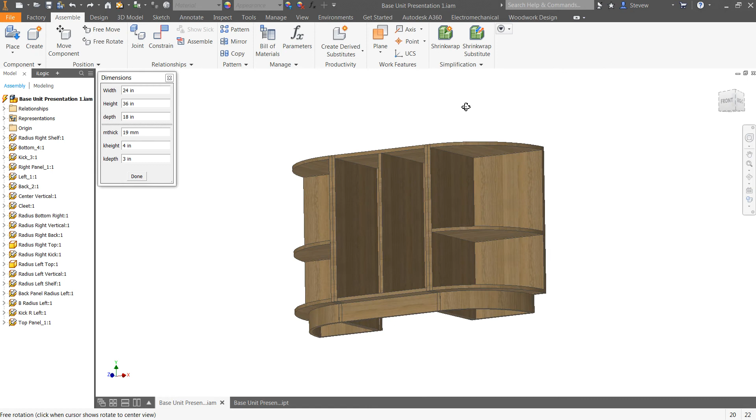In our first session, we showed how we could model this very quickly and also have it fully adjustable and adaptable to the needs of our clients, staff, management, or whoever else needs possible changes in the model. These were all done using iLogic. If we want to change the length of this unit from 24 to 32, and change the kick height from 4 inches to 2 inches, all we have to do is an update, and the entire cabinet changes as requested. So the ability to change after the fact in Inventor gives us a tremendous leg up in design.

Every single woodworking project I've ever seen always had some changes after we thought we were done.

The other aspect is we take a look at some of the joinery built in our last session. We have some simple dados for the back. Other things are just butted together. Let's just take a look at a shelf or two, and we'll see what we have. These shelves are just butted to it, and we'll show you how they're going to be doweled, biscuited, or just screwed in.

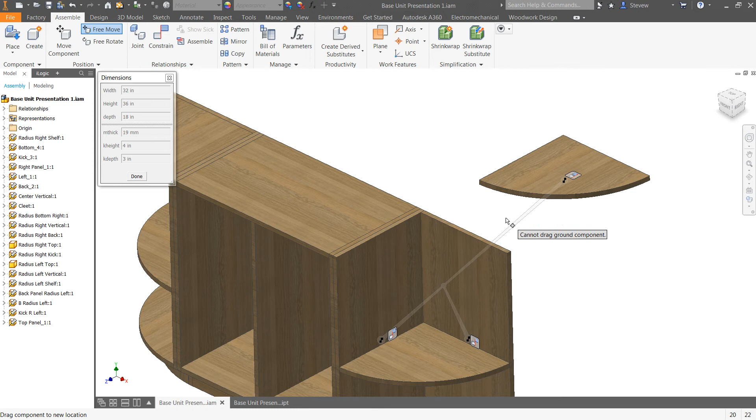The other thing about this is that these are all at one level—this is not an indented bill of material by any means. If I looked at the bill of material, we'd have a flat bill of material showing each of the parts. It's in something called a base presentation, and each of the parts is listed with their length, width, and thickness. This can go out to an Excel spreadsheet easily for cut listing.

Before we go much further, I'd like to group these. Obviously when we build, we probably build the two ends independently and the interior independently, and then pull it together. So the first thing I usually do is put a window around just the right panel, right click on it, and say I would like to take these components and demote them into an assembly, and we'll call this right unit, and pick OK. The right unit is now in its own assembly.

If you take a look in the browser, it says right unit, and if I want to turn the visibility on and off, you can see we now have control of that independently. Let's turn the visibility back on and do exactly the same thing with the left side. I'm going to put a window around it, make sure I catch everything necessary. Right click, go to component, demote, and we're going to call it left-dash unit, and pick OK.

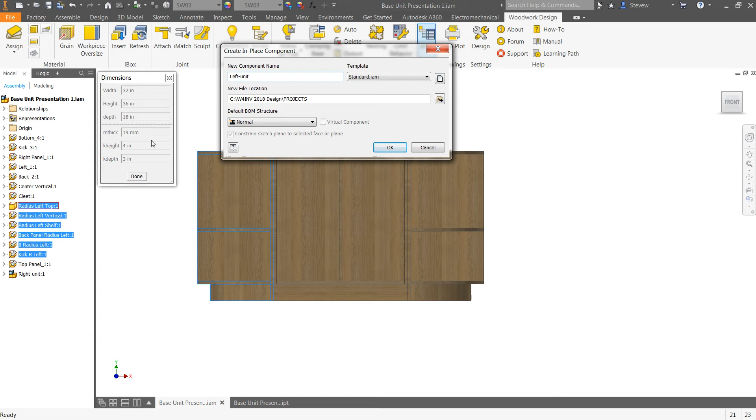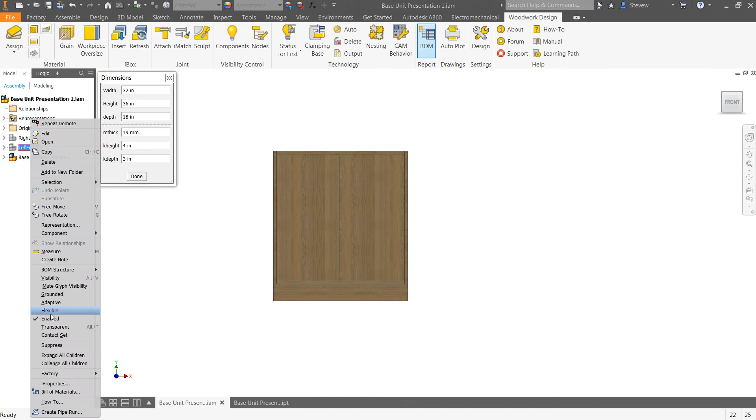I'll turn off the visibility of the left unit and the right unit. Each of these will act independently and can be opened and used independently. I'll put a window around everything left, and do the same thing again—component demote—and we'll demote this into a base square cabinet, and pick OK, and pick OK. Now if you look in the browser, you'll see that all of the different entities here are now independent units that could be opened up, saved, and used independently.

Just pick save and save our work.

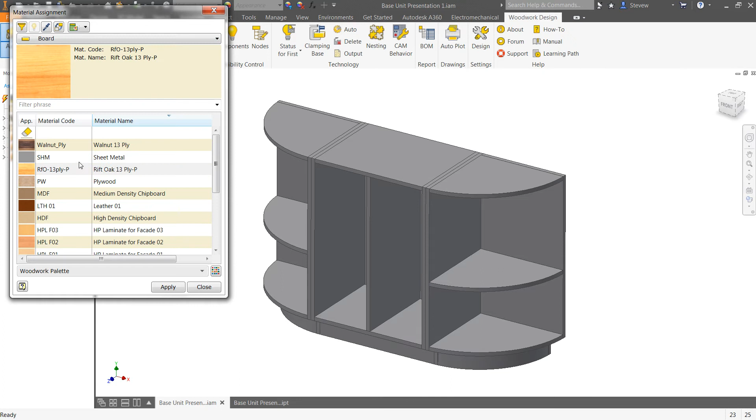Now, even though they are made up of 3 individual sub-assemblies, we still have the same type of control. Let's say it's 24 inches overall, and we'll do an update, and you'll see that it's adjusting also. If we don't like the grain and grain direction at this point, let me go ahead and remove all the materials of each of the parts—that's all 23 parts. And I'll say that everything should have been made out of rift oak, and pick apply.

By doing that, it's going through the system and already assigning it. If I want to say that one of these pieces is going to be made out of bird's eye maple, I'm just going to pick parts 1, 2, 3, 4, and 5, and now they're all going to be bird's eye maple. The quality of the imagery is really second to none, and I'm not even in a rendered mode.

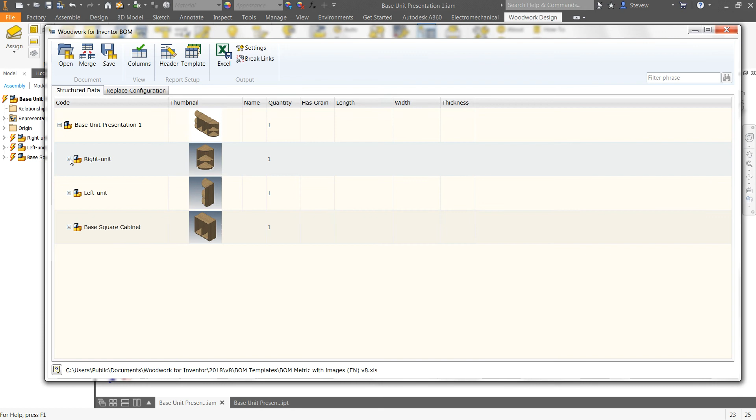At this level here, we have an indented bill. So if we went out to the bill of material, you'll start seeing the right unit with all the materials, here's the left unit, and so on.

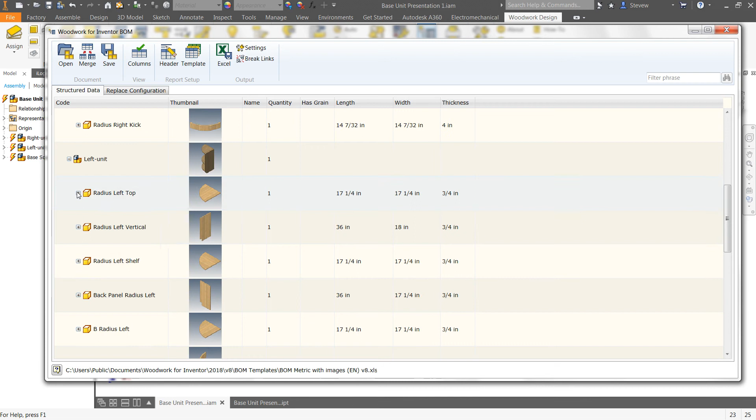And you can also notice that if you click on this, it's going to tell you what each of the parts are made out of. So a lot of capability.

The other thing is, as I said before, these are butt together. So if I move one of these pieces, you can see they're independent. Or if we go further and move just a shelf, you can see that the shelf itself has no joinery as of yet, and that's where we're going to be focusing most of our attention this afternoon.

Just a quick refresher - the tools that I'm using for material assignment are all available under Woodwork, Design, Assign. And in the assignment tool, we have the ability to assign solids, meaning hardwoods and softwoods, boards, which are plywood, MDF, and the like, laminated boards, and so on, veneers, edge banding, and the like.

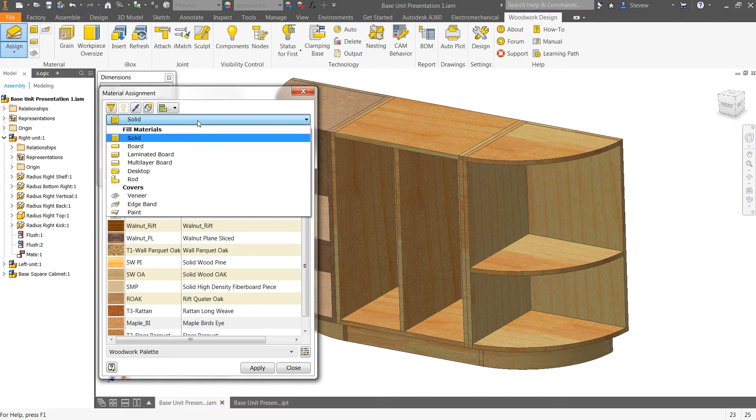These are all tools that woodworkers definitely need, but Inventor by itself does not have the functionality built into it that we have added. Of course, this is fully customizable, and it's downloadable on the sites that I had listed previously.

In woodworking construction, whether it's traditional joinery or the most modern type of furniture one builds, and whether it's wood, plastic, metal, we find that we start with simple panels a lot of the time, and we have to join them together in some fashion. Joining could be glue, screws, dowels, biscuits, knockdown fittings, confirmat screws - it could be really a host of different things.

But we are told that we need to do something. Well, we know we have to do something. And based on the type of construction you do in the shop and what machinery you have and what kind of construction it's going to be will determine, of course, what method.

The one thing about utilizing Inventor and woodworking for Inventor is that there is no limit to its capabilities. So it doesn't really matter what your construction technique is - we can let the software handle it. Again, good software is easy to use, and it's absolutely flexible, and that's what I'm hoping to show you today and how it's done.

So in this particular project that we're looking at, we've got 3 cabinets. What I'm going to do is turn off the right unit by turning just the visibility off, and the left unit, turn the visibility off so that we see it a little bit clearer, nothing in our way. And if I move this center panel, you can see this is a blind dado that we had created in our first session.

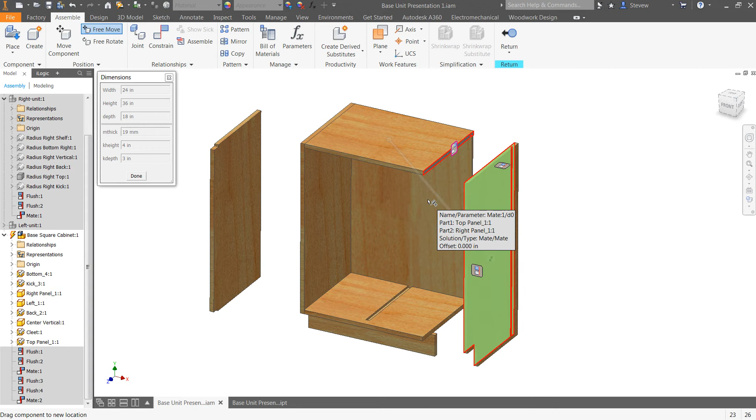But as a blind dado, that's okay. But these side panels, you could see, are butt together. There's no joinery whatsoever there. And you can see that there's no joinery there either.

So our goal is, at least in our first step, I think what I want to do is create dowel joints on all four sides - on all four sides of this panel, on this cabinet. And we should be able to do that within 30 seconds.

It's really quite simple because in our world, we use pretty much similar things over and over again. The size of the dowel, diameter, and length is pretty simple, pretty similar. And then, of course, the boring pattern, depending upon your boring pattern - that means what is the distance between the holes - that should be a standard also.

So in the past, I've always suggested we must have standards in place that we all can adhere to. And that standard could be the standard within your company, doesn't mean the standard that is being told to you - whatever works for you. So the first thing I always try to do is develop a standard library of items that any of my woodworkers would use, and one of those I call boring patterns.

A boring pattern for a cabinet like this might be a 32 mil system, where the first hole is a certain distance from the front and every successive hole is 32, 64, or 96 millimeters back. It doesn't have to be a 32 mil system, but that's what I'm using at the moment.

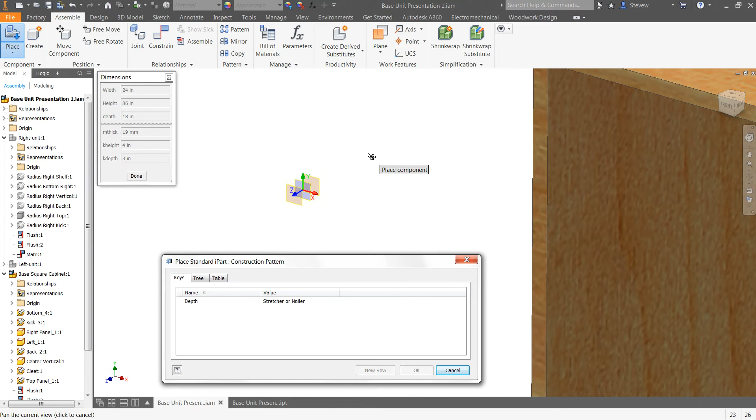I can create a boring pattern, and since it's an iPart, I can say I want a pattern for things that are stretchers or nailers, and you'll see it's only three planes. Or I could say less than 15 inches, and you'll see there's more, that's a 15 inch depth, or even greater than 15 inches. So we have the ability at any time to have a preset pattern of planes configured in a way that makes sense.

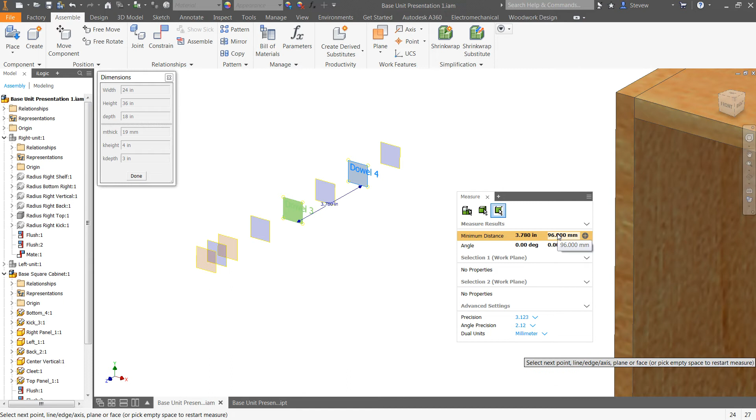For example, if I measure the distance between dowel 4 and dowel 3, I'll look at it in metric. You can see it's 96 mil. If I go from dowel 3 to dowel 2, that's also 96 mil. And the first grouping, dowel 1 to dowel 2, is 32 mil.

Again, these are your calls on what you would like it, how you would like to adjust it, and how you would like to present this.

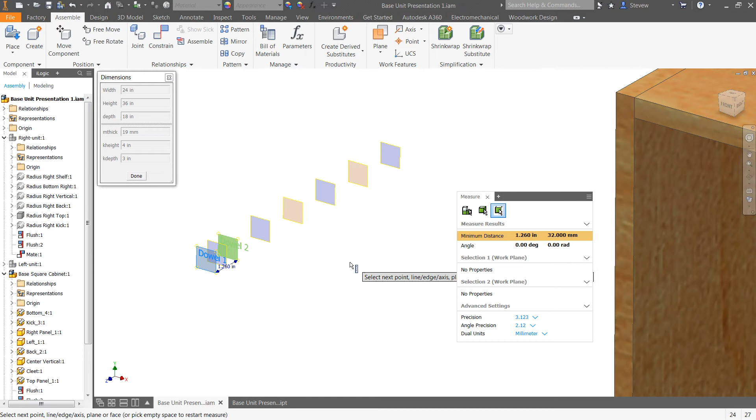Once we have brought in our work planes, or what I'll call my boring planes, these planes can be labeled, they can be defined, and they're preset to be a certain distance between planes, just like boring would be a certain distance between the center holes. At any point we can change these because it's an iPart, and we can say no, it should have been for stretchers or nailers, and it'll adjust accordingly. So one plane, or one series of planes, has the ability to really function as many.

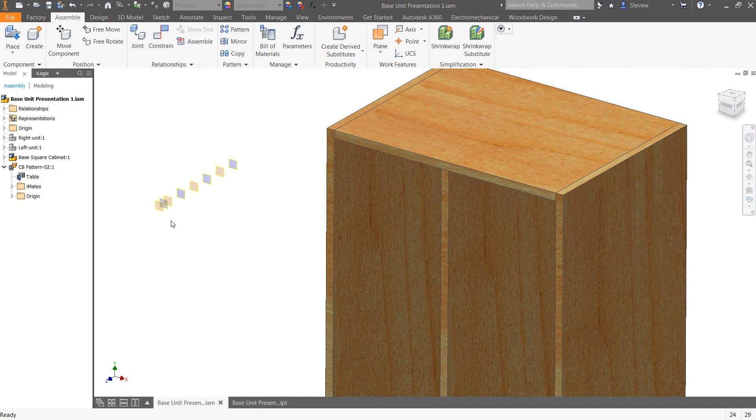We also notice that if we measure these planes, the distance between the first dowel and the second dowel is set to 32 mil. Then from the second dowel to the third dowel is 96 or 64. All of these are preset to be exactly the distance - not close, not about, exact.

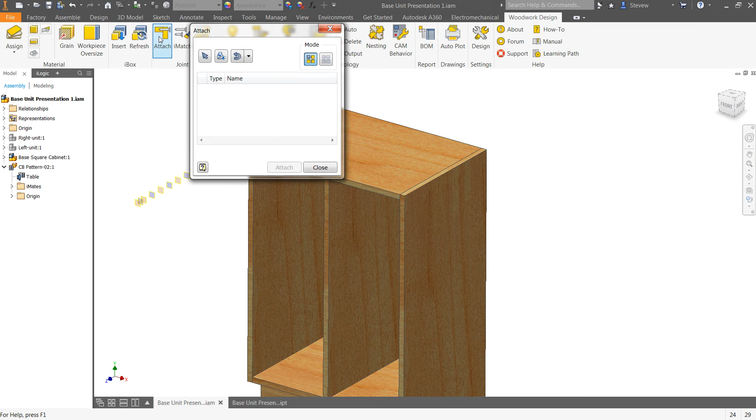The next thing is to set these up so they actually attach correctly to this particular piece of furniture. So we go to Woodwork Design, pick Attach, and touch the planes. Everybody gets prompted. For reliability of accuracy and standardization within the group, this really stands out because everybody does it the same way, and everybody's holes should come out the same way.

It's asking you to select the front face of the cabinet, which is here. Select the top face of the cabinet, which is there. And select the top edge of the cabinet, which is there. You can see it automatically constrained the work planes to exactly where it had to be - not close, but exact.

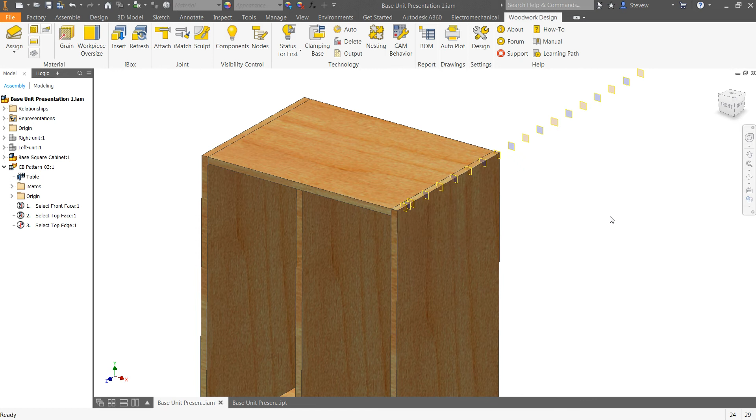If for some reason you needed it to be longer because this is an 18 inch cabinet and I only have 15 inches worth of work planes, you could again say I want it to go greater than 15 inches and pick OK. It still maintains the constraint, but now if we had a depth of a 25 inch or 30 inch cabinet, the dowel boring would be correct and absolutely accurate.

So how do we create those work planes? Because that's step one - we must create boring planes to be used over and over and over again, and that is our next step.

The creation of work planes in Inventor is quite simple. Our goal is to standardize the way that our group actually designs and creates data, and then of course link it directly to the manufacturing process.

With the usage of this tool, plus some of the other features I'm going to show you, I think we'll be able to accomplish that particular task.

If we standardize the way we construct or design things, it'll be easier downstream to actually build whatever we do, because it will be pretty much the same over and over again. Locations could be different, designs could be different, but the core of construction that controls the machinery can be very similar. On top of that, if everybody does it the same way, we're standardizing our design department.

So now we want to create our first boring pattern. To do that, it's fairly straightforward. This is the existing one that I had brought in earlier. I'm just going to go to File, New, and I'm going to create a standard part.

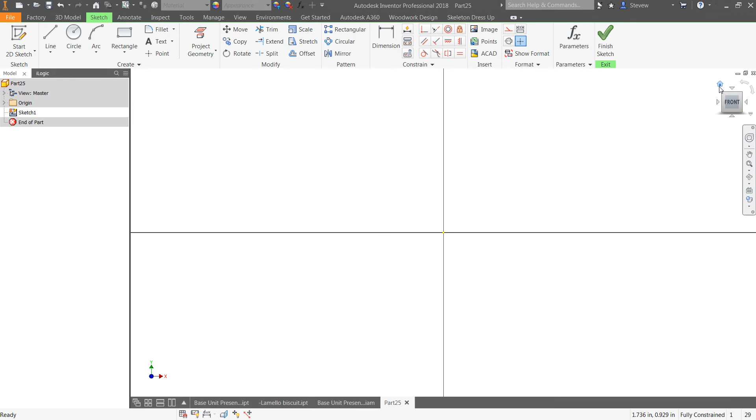I'm going to immediately turn on the XY plane, turn on the visibility of the XY plane, and then look at it in home view. Now, if you have picked the plane you want to work on, you can do that also, but I want to keep this work plane on. I also want to turn on the Z-axis, so I'll go into Origin and turn on the visibility of the Z-axis.

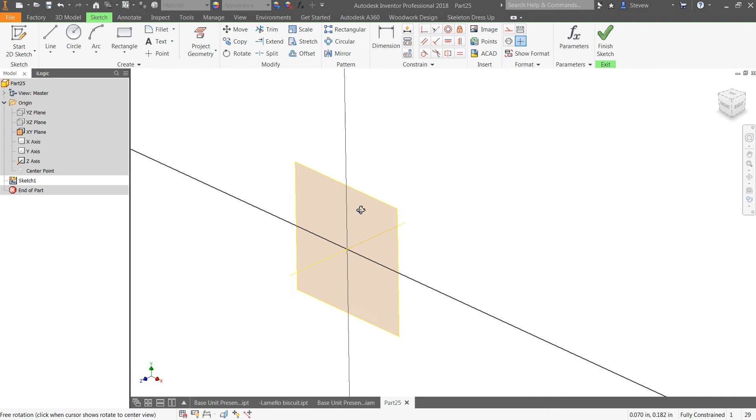So now what we look at is we have a plane and a center axis that define the Z direction. And what I'll now do is I'll say finish the sketch, so you can see where we are at this moment.

Now, this plane that you're looking at is going to represent the location on the very face of the cabinet. So I'm going to marry that plane to this front face, the long grain face. Now, that's up to me how I want to do it. So there's no absolute here. It's working with the tool to accomplish the task that you're looking for.

So if this is the front of the cabinet, where is the first dowel? Let's say we're doing joinery here. So I'm going to create a plane. I'm going to touch this existing plane, pull on it, and say it's minus 25 millimeters. So the plane from here to here is 25 mil. I'm now going to go back, pick plane again, and this is minus 32 millimeters.

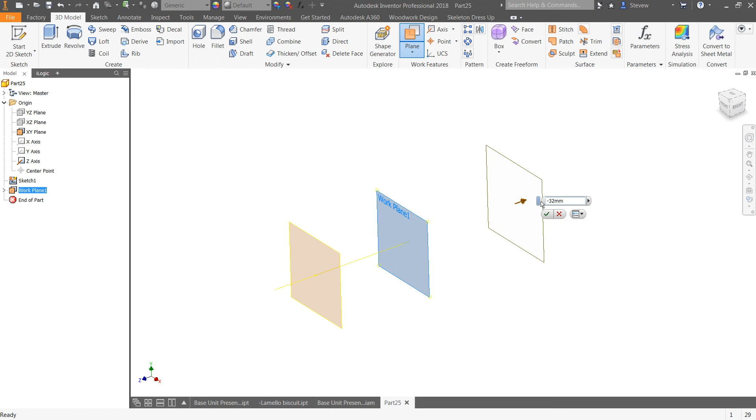If you're working in inches, do inches. If you work metric, work metric. But because we're working a 32 mil system, this is probably preferable. I'll touch this again, minus 32 millimeters. I'll go ahead and continue. So really what I'm doing here, I'm going to say minus 96 mil. Plane again, minus 96 mil.

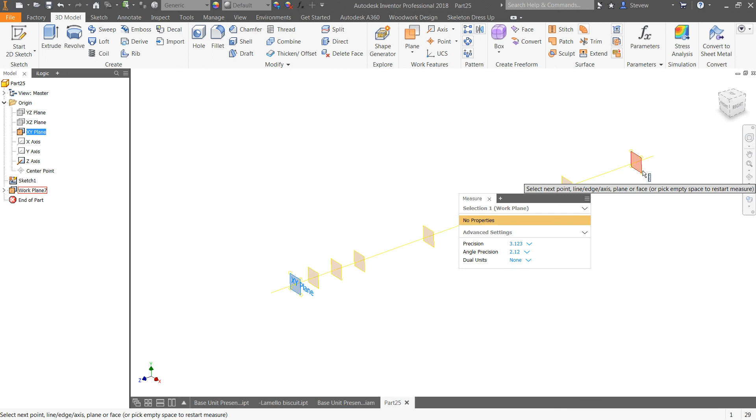So within a couple of minutes, you have the ability to create all of these boring patterns either in one file or in multiple files. I'll do one more, minus 96. So if we measure the distance from the first plane to the rear plane, this is 18.622 inches, and that's okay for what we're doing today.

Now what we'll also do is I'm going to right click on this and say auto resize. On each of these planes, I'll do an auto resize, which will allow these planes to adapt well to what gets picked on it. In other words, when we pick what we're attaching it to, the size of the planes visually will change or not change, depending upon whether you have auto resize on or off.

So again, all I'm doing is going down the list and picking it, nothing more. Then I'm going to save it, and I'm going to say this is boring pattern 25 millimeters. Okay, boring pattern 25 mil, and pick save.

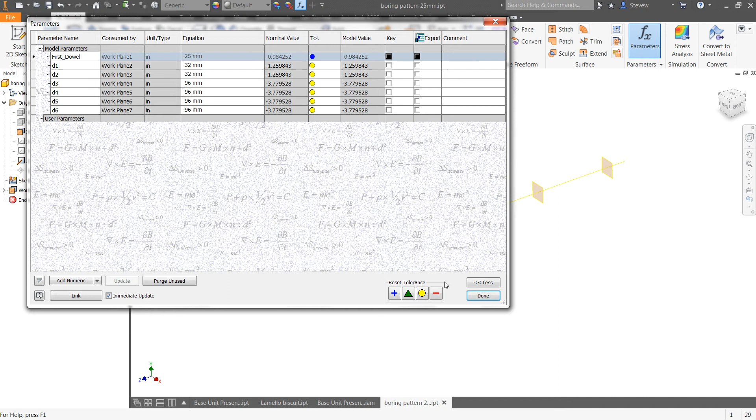Now we can also automate this a little bit because I can say parameters here, and I can say this is going to be front, we'll say first dowel, it'll be 25 mil. So I'm going to automate this on top of everything else. Pick done.

So now what we have is a set of work planes, and they're exactly what they should be in terms of size. And if you take a look over here, we can start labeling them or numbering them if we want to. So I'm going to go back to the first plane, and I'm going to say this is dowel 1.

And the second plane is dowel 2. So now when I move my mouse onto these, you can see it's dowel 1 and dowel 2. Now sometimes you might have a secondary plane, or sometimes you're using joinery, but you're also putting Confirmat screws in at the same time. So what we can do here is we can create a plane between the two planes that already exist.

Now, you really can't tell the difference of one versus the other because they all look the same, but on this plane, I'm going to right-click and flip the normal. And now that looks like a bluish color, and this looks like more of a pinkish color, and that's telling you one side is positive and one side is negative.

Now, when we do that, you can also notice that each of these can also adjust. So we'll rename this one to drill. So now when someone picks it, it'll know that it's a drill rather than a pilot hole or a dowel hole.

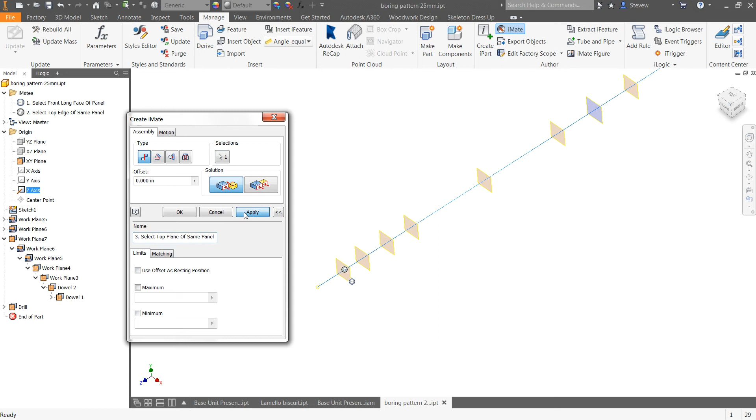So what I'm doing here is I'm setting up a standard that'll prompt the user what to do each and every time, so that every user will do it the same way. Consistency and standardization is critical in terms of improving productivity. If I get this file that was done by one of my partners, I'll know exactly how they did it. Thusly, I know exactly how to fix it, change it, edit it, manipulate it.

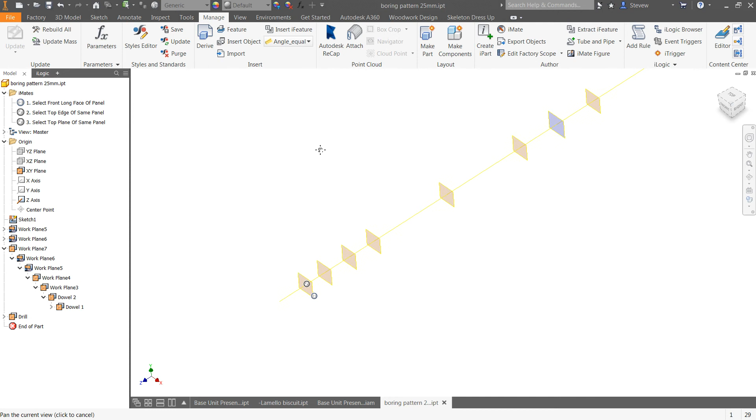I'll now go ahead and turn off the XY plane visibility, and the Z axis visibility, and pick Save. And I'm done. Boring pattern 25 mil. Let's go further with this now. Let's go back and use it. I'm going to get rid of the one that's here already.

Less than 15 inches and so on. Well, I'm going to dump it, don't need it. How do we now use what we just did? We go back to Assemble. We pick Place, and let's scroll down and find it, okay? So this is going to be...

Let's look for it. Boring pattern 25 mil. I click on it and place it. So this is exactly what we just generated.

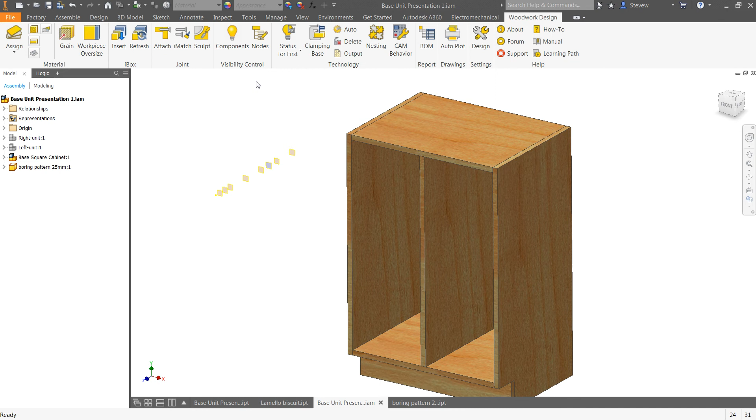And the next thing we want to do is attach it. Now you can use constraints like we've done previously. Nothing wrong with doing it that way, but that's the long way. Using woodworking tools that you can download, I will attach, it's called, these boring patterns. And it now prompts the user what to do. Every user is going to be prompted the same way.

So it says select the front long face of panel. So if I just touch the front face of this part, like I'm doing here, this first panel, this plane and this plane are now perfectly aligned. Select the top edge there and select the top plane there. So what I've just done here is I've created work planes that are exactly located correctly. If I measure the distance between here and here, let's look at it in metric, that's 25 mil.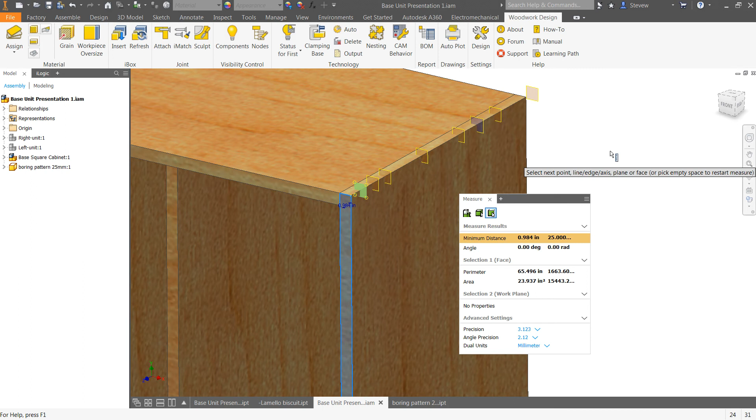If I go back and measure from here to here, it's 64 mil. I measure from here to here - again, all these are adjusting or being adjusted based on what I had told the system I wanted. Here to here is 96 mil. So we have accuracy, complete accuracy here if we so desire.

Now the other thing we can do here is this. We have the ability to change the fact that this is 25 mil. Sometimes the front plane needs not to be at 25 mil, maybe it's 30 mil for unique situations. Well, in that case, there's nothing stopping you from just going into parameters and changing that one distance.

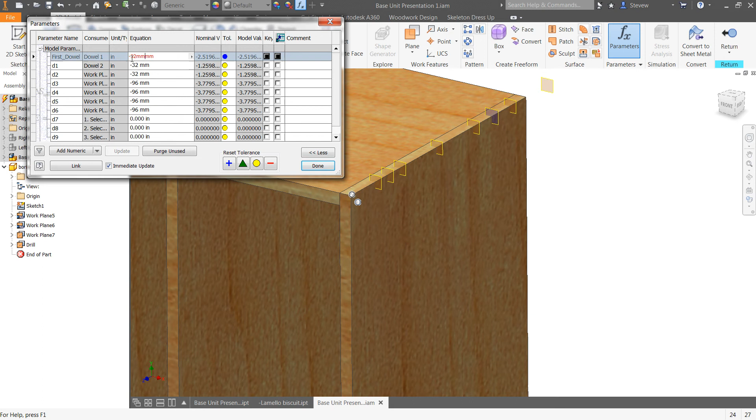Now, whether we do it through iLogic or any other way, I'm going to say minus 64 millimeters. And you can see that the first plane just moved back and all the others maintained the same relationship based on a 32 mil system. And the goal, of course, is going to be for us to dowel it up on those planes.

Now that the boring patterns are complete and adjusted to our particular needs, whether it's one pattern or multiple patterns, the next step is to build the libraries necessary for all of the hardware, the joinery, all the unique things that we as woodworkers do that, believe it or not, are somewhat common between jobs. Doweling and joinery are, of course, one of those.

So what I'd like to do is show you how quickly we can build a library part and use that library part. I have them already done, but I'm going to show you the technique that we use to accomplish that particular task.

To do that, we need to open up a new part. I'm going to create a simple diameter. I'll say dowel diameter equals 8 millimeters. Now, of course, if you're not working in metric and you're working in imperial, whatever the dimensional values are.

And then I'll extrude this asymmetrically. That means from the work plane that I started on, I can move in two directions. So one of those directions will be 0.375, or 3/8 of an inch, or half an inch - let's make it half an inch, 0.5. And the other one will be 1 inch. So we have a dowel that's 1.5 inches in length.

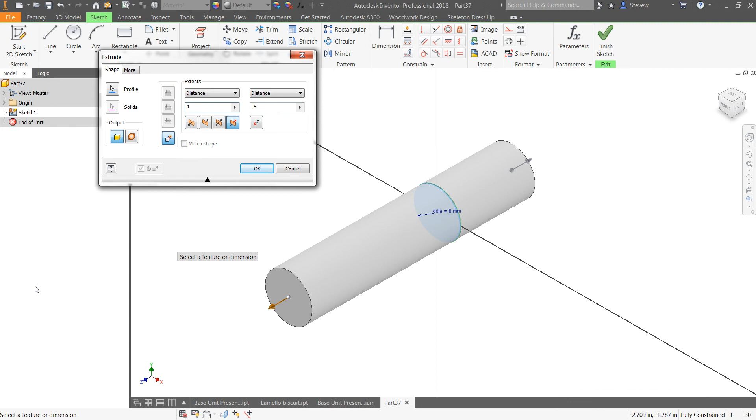I'll pick OK. I'll also, at this point, go into my origin and turn on the XY plane. You can see that the XY plane is going to determine or define panel A from panel B - that'll be the joint between it. Where a half an inch will go into the side panel and 1 inch will go into the end grain panel, or whatever the dimensional values are that you care to use.

Now, let me pick save, and I'm going to call it variable dowel 1. And I now have that part almost created.

Let's go ahead and assign some material to it. So whether this is maple or what have you, you assign a material to it - already done. And I also want to go into Tools, Document Settings, and tell it that it's a purchase part - bill of material, purchase part - because I want it to segregate from everything else and list it as a part that I'm not going to build.

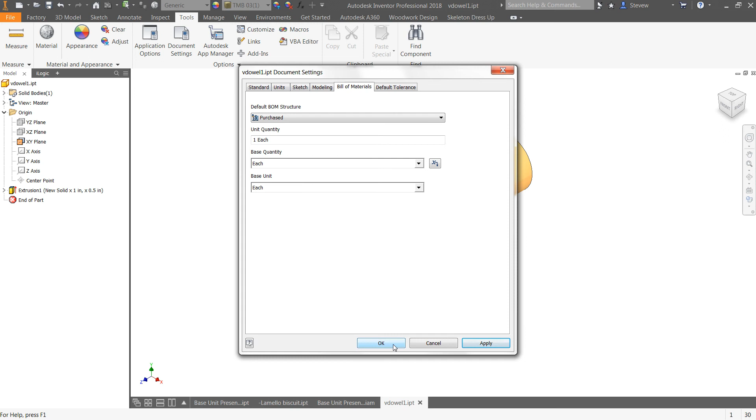I'm not going to turn dowels, I'm going to buy them. So in the cut list that we have, and any listing we do, we want to make sure we have that available to us, and that's taken care of now. Next step is, this is accurate, it's 1.5 inches, it's 8 millimeters in diameter.

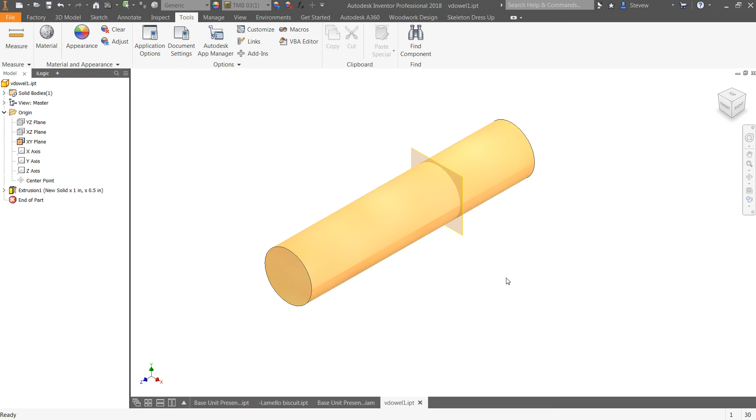The next step would be for us to create now the machining - the exact machining that if we send this out to a CAM tool, it'll understand it, or if we go out to working drawings, it'll understand there's holes in both panels.

So what I'm going to do is sketch on the end of this, and I'm going to extrude on top of it to the other side. But the difference here is I'm going to say it's a new solid - that's very important. And pick OK. So there's two pieces on top of each other. We'll say 2.

New solid, pick OK. So you can see there are two solids here. The first solid was the dowel. The second solid was the machining. If the machining is larger than 8 mil, you would have put it in. If the machining goes beyond the dowel for space in the hole, for air and glue, you would have done that also. The major difference in working this way is that we now have two solids.

For the second solid, which is the machining solid, to actually cut and mill the material, I must put a dash in front of the name. So I'm going to put a dash in front of solid 2, and the system will understand the dash and cut into whatever it touches. Sometimes I also change its name so it's easier to see. Not necessary, but some people enjoy doing that.

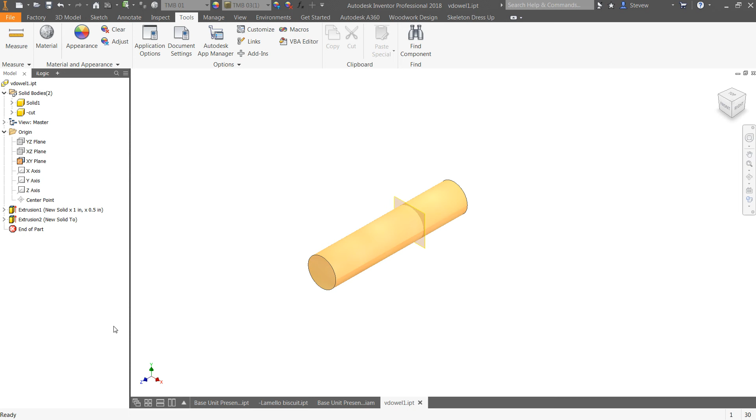For us to continue, what I'd like to also do here is turn on the Z-axis, and I'm going to turn on the XZ plane, because what we're going to do is create iMates that allow us to set this up easily when it's brought into a model and add it quickly to the assembly. So we've done that now, and I'll pick Save.

Let's go further and add the iMates themselves. So we'll go to Manage, iMate. I'm going to touch that work plane, and I'll say 1, select, face, grain for boring, and apply.

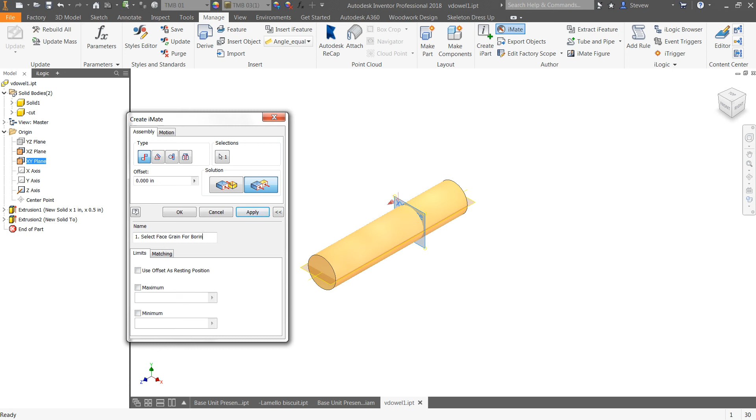Okay, I'm going to touch this, and I'll say 0.375, 0.375. Okay, select, face, grain, offset, 0.75 thick, or whatever information is something that you remember what to do, because everybody will see this and everybody will work from whatever this documentation prompts you for.

And then finally, I'm going to pick the center axis, and I'll say select work planes for dowel location, and that'll be number 3. Pick apply, and that's done.

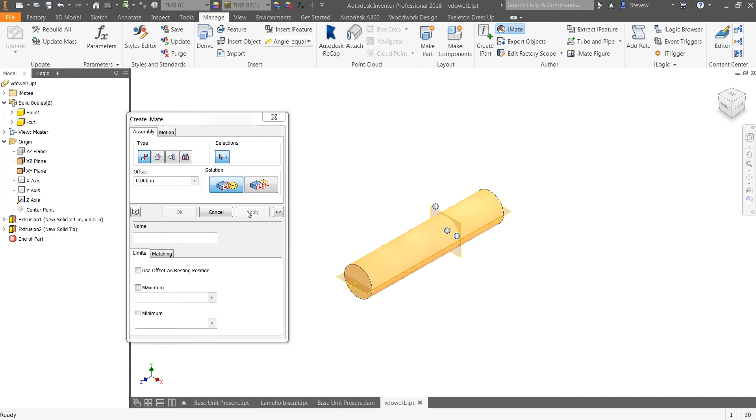So you can see here under the iMates, here are the 3 iMates. The order in which I entered them is the order in which it's going to prompt. But you can move these around by just dragging and dropping them if you'd like. I'll turn off the planes and the axis because I don't need them anymore.

And we now have the dowel. Last step in the process is I want this to be an iPart because I want to be prompted whether it's an 8 mil or a 5 mil dowel. So I'll go ahead and create an iPart. This is the D diameter.

I'm going to add a row, and I'm going to say this is 5 mil. I'll also add a description, and the description will be an 8 millimeter dowel, 1.5 inch long.

Let me open this up a little bit so we can see that. Control V, and let's say this is 5 mil. There we go, pick OK. So right now I'm going to pick Save, and what we have is finished and complete.

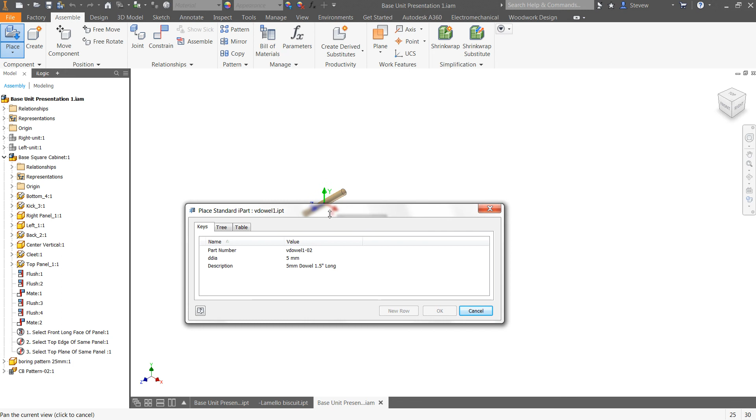The first thing that it's going to do is prompt me for information. So if I want a 5 mil, you can see it's 5 mil. If I want an 8 mil, it's an 8 mil. Okay, and I can place it, and it's done.

Now, for testing, the best way of testing this is to use the tools. You can use iMates or constraints, but the better way is to just use attach. I'll pick attach and touch the dowel, and it's prompting me for the information that I had asked the system to give me before. Now I can either attach singly, one at a time, or I can attach multiples.

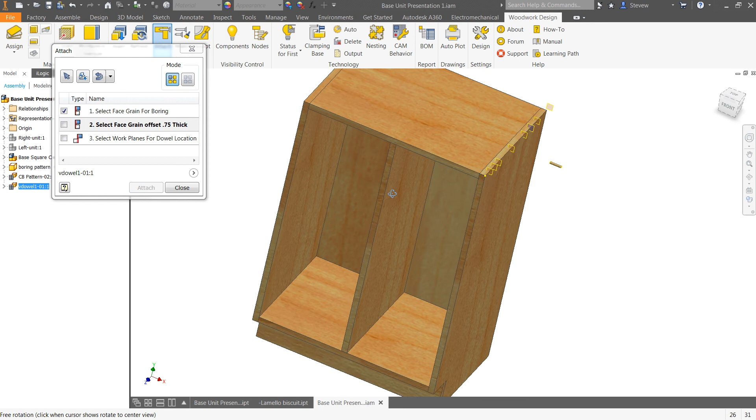So if I say single, it's going to say select the face grain for boring. So the face grain that I'm going to use for boring is here. I now touch that. Secondly, select the face grain for offset, which is here. And then thirdly, select the work plane to put the dowel, which is there.

Now, let's turn off the shading so you can see where the dowel went. So you can see that it's 1 inch in, half an inch in, and 1 inch in that way. So it accomplished what I was looking for. Let's go shade it again.

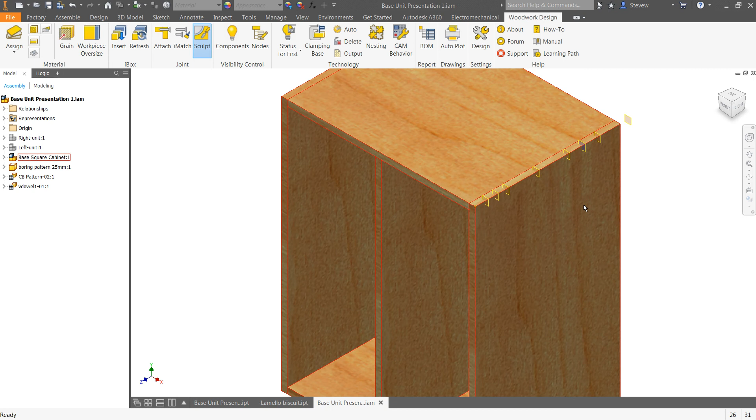And if I now pick sculpt, what it's going to do is drill the holes. Let's see what that looks like. I'm going to take this right panel and open it. Let's rotate it around, and you can see it drilled a hole exactly where it had to be. Let's check it out. Let's measure.

The center point of the hole to this face. Make sure it is in millimeters, and it's 32 mil, so it's dead on and absolutely accurate. So it did what we wanted it to do. Now let's look at it on the other side now.

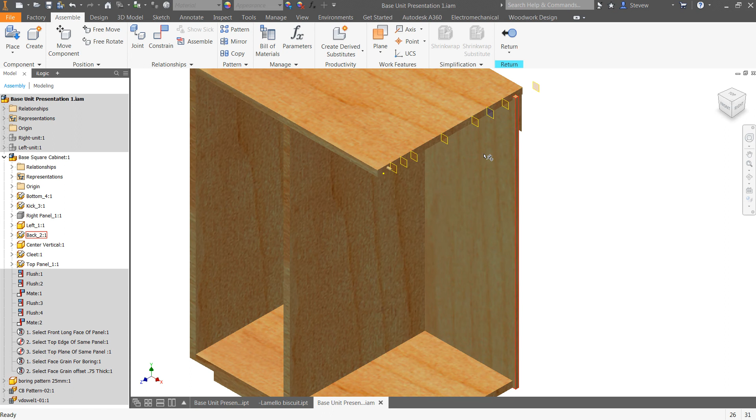I'm going to turn off the visibility of it here. I'm going to move it, and the dowel is now cut. And the dowel is exactly on the work plane, as you can see.

Now, what happens when you move the dowel? Okay, let's go ahead and sculpt again. It heals.

Okay, so what you just saw here is a way that allows you to be absolutely accurate and standard with everything that you do. Let me turn on the visibility of this, and let's do it one more time, but I'm going to use one of the ones I already had in place.

Okay, so this is the method that I normally would use. I would pick place, I would go to my library, I'd go to connectors, and I would go ahead and pick wood pins, and I'd pick one of the wood pin environments that I normally would use.

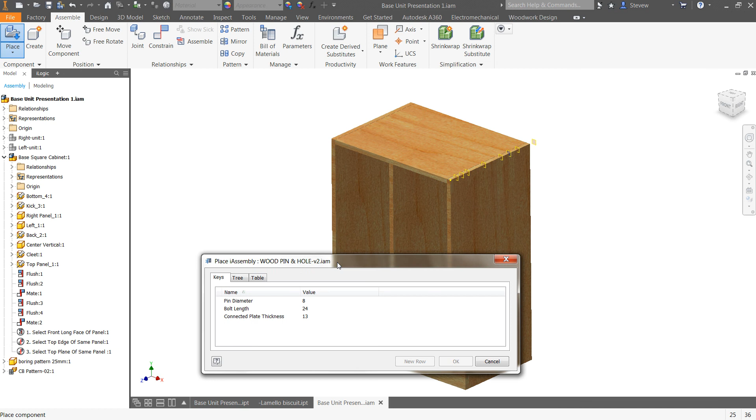When I do that, similar, 8 mil or 5 mil, but you can also see that I have the length of the dowel and how deep it goes into the side panel. And again, this is all metric, but obviously this could be English if we so desire, okay?

Now you'll also notice that I am going to drill a hole longer than the dowel. So this is what I was saying earlier. So if I want to now dowel everything here, not just one corner, here's the process.

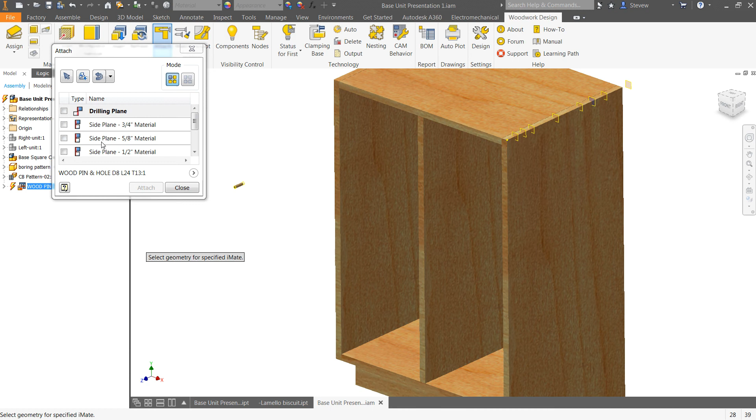I pick attach, I touch the dowel, and it asks you for the drilling plane. I'm going to drill on this face. Well, first of all, what I'm going to do is make sure I do multiples. This is single, this is multiple. I'm going to do multiples now, okay?

The drilling plane is going to be here, and it's going to be on the opposite side of this board. There, 3/4 inch material, touch here and here. And then the axis or the work planes I want it attached to is 1, 2, 3, 4, 5, and 6. And I pick attach.

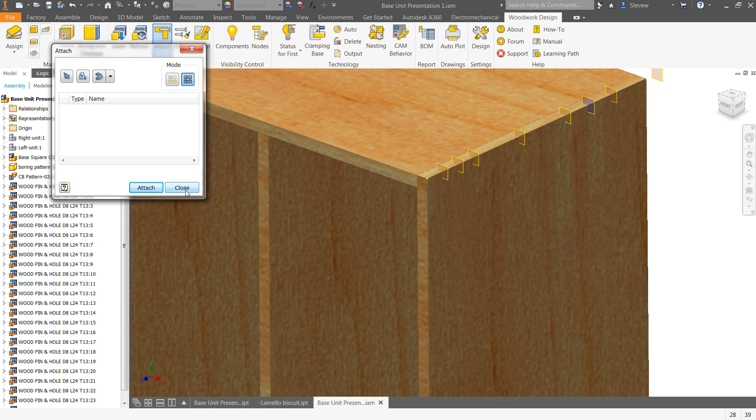What this just did is it put in quite a number of dowels all at one time. Make sure I get rid of all of that stuff that I don't need, okay? Okay, so let's see what happened here.

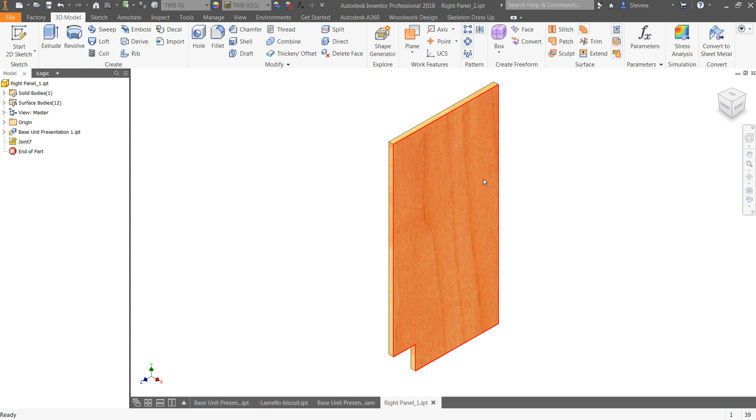I'm going to sculpt and sculpt my work. I'm going to touch this piece and open it. Let's rotate it around, and you can see that this is all complete and done already and accurate.

Let's go further with this and turn the visibility of that off, right? And if I want to, I can turn the visibility of the boring pattern off. I don't need that on. And if we move any of these, right? Sorry.

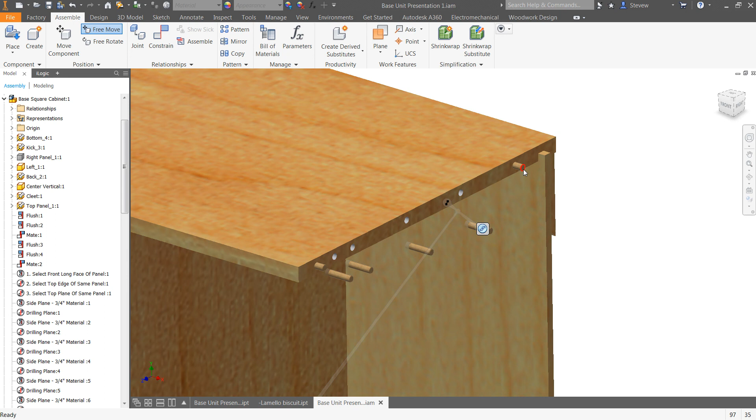You can see that these are all drilled. If we open up this piece, this is complete.

Now, let's say that we made an error. Does happen on occasion. Let's do an update. Update our work. Everything goes back together.

Let's say we did make an error in our judgment, okay, for what we just did here, okay? So I'm going to turn on the pattern again. Let's turn off that one and turn this guy on.

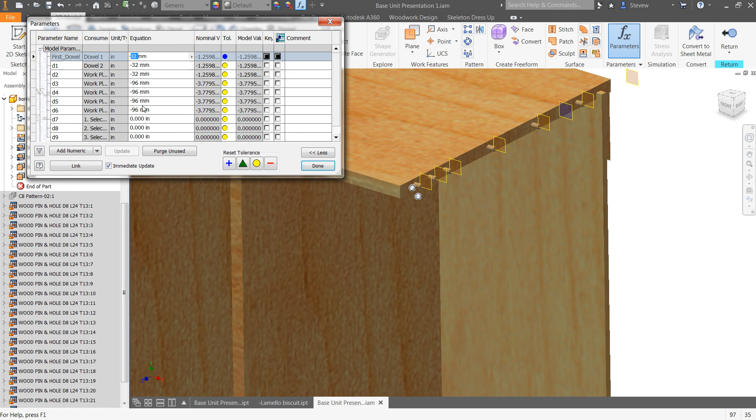This is 32 mil off the front right now. If I say, no, it's 25 mil off the front, my mistake. If I said that this was 25 mil off the front and pick done and hit return, you can see that all of these holes, all the dowels moved forward, but the holes stayed where they were.

If I went ahead and sculpted one more time, then of course, because the dowels move, the holes move. And now that's accurate again. So again, this is just a very fine and easy way to build. And what we just did here with a simple model can be extrapolated into the most complicated type of woodworking

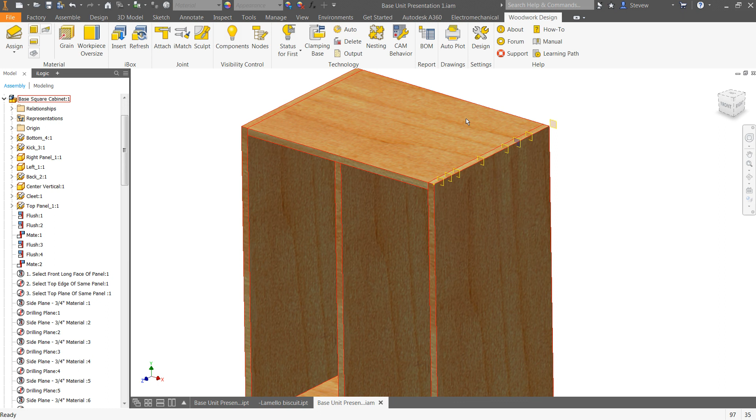you can imagine. If we went to a bill of material, let's just do that and check that out. Bill of material. You'll see that I have 24 wood pins. They're in the system right now also.

Let's turn on the left side and the right side of this unit and look at the entire assembly. So in the browser, we'll just right click on them, pick visibility, and we have them turned on.

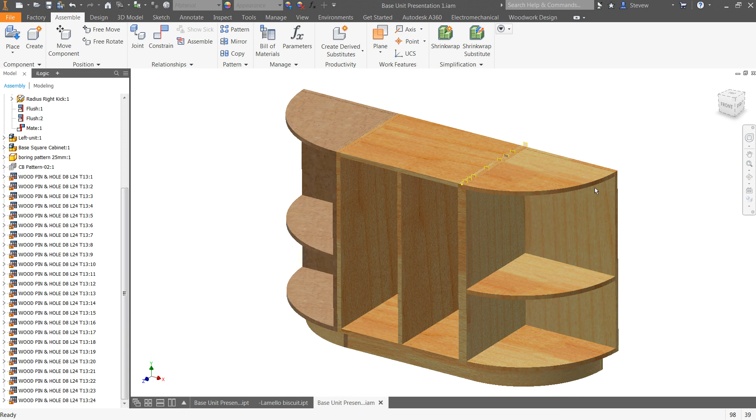Now that we've created joinery for the center with the boring pattern we've defined, maybe on the right hand side I'm going to use biscuits instead, just as an example. So I'm going to say place, and you can see we have libraries of all kinds of items, or you can build your own library. I'm going to go to fixed joints, Lamello biscuits, and grab one.

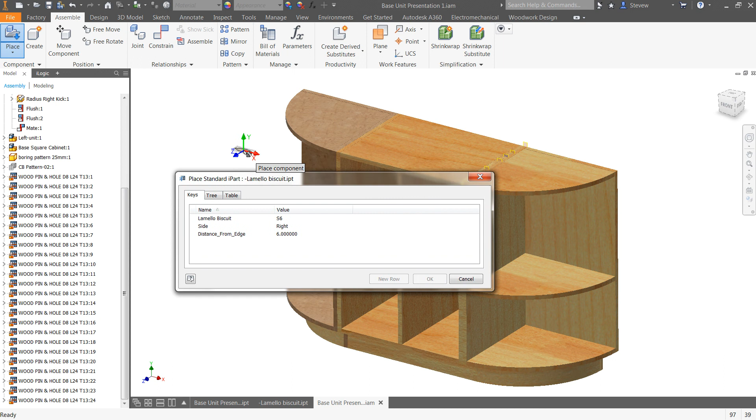What's interesting about this, just like with the different dowel diameters, we can have different values of biscuits by the naming conventions that the hardware vendors have decided upon. And of course we can change their values at any time and place it.

Okay, so let's say we want to put 1, 2, 3, 4, 5, 6 biscuits in at any time. Also, if we want to put them down the back and we don't have a boring pattern, or don't want to build one, all we have to do is select work planes.

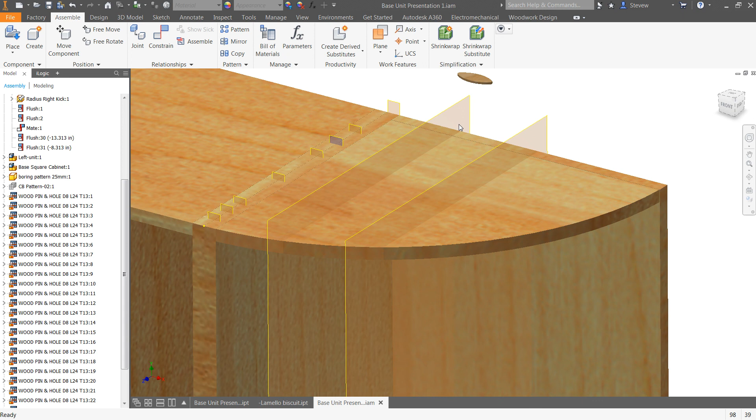Define where they should go, which I'm doing right now. You can see that we can define work planes so that they will automatically adjust to where the planes themselves are at this moment. So again, quite simple. Let's attach this Lamello biscuit.

And I'm going to do multiples, and it's asking for the miter plane, okay? Again, naming conventions, what's common to your world? So what I'm going to do is move my mouse onto this edge, and then select that face.

We've already done it. Now, inner side plane - I defined that as the bottom of the shelves. So that's 1, 2, and 3. And then finally, what center axis, or work plane, do you want them attached to?

So I'm going to put one there, and one here. And if I don't want to use any of these others, I don't have to - I could if I want, or I can put another plane here if I want.

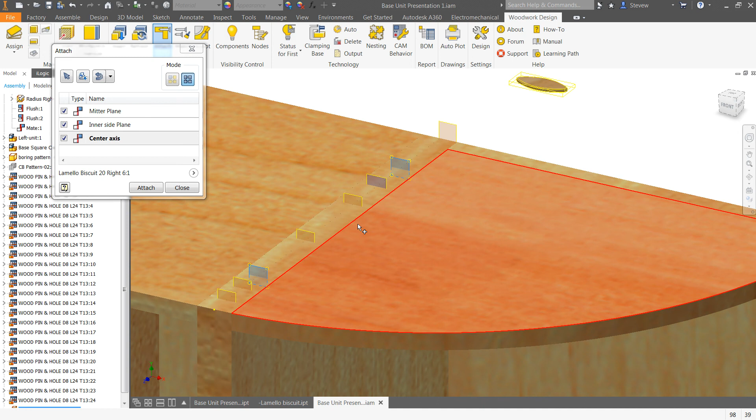And I pick attach. Once that's done, I'll close this. Now once this is done, we can take a look and see what just happened here. I'll get rid of the master, and let's move this and rotate it a little bit. You can see those are done, and these are done.

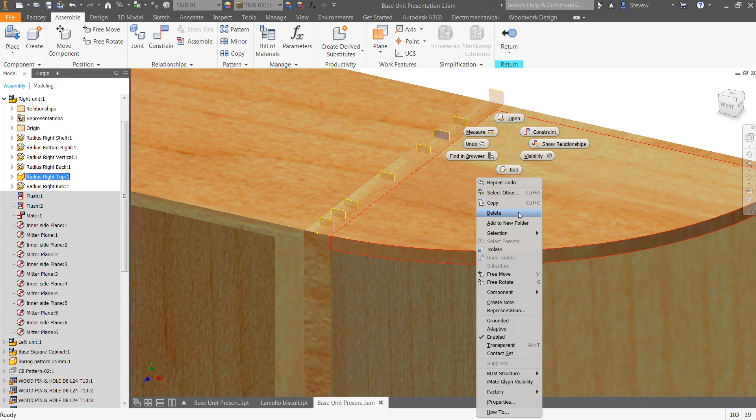It's very, very simple to do, to accomplish this. Now let's turn off the visibility of that, okay? So you can see that if we want to move these, we can, and you'll see that they're cut into the sides here - again, absolutely accurate. Going the opposite way is more of the same.

There's two more items I'd like to show that really cover a lot of territory. These are all, again, negative shapes. In an upcoming seminar we'll talk about positive shapes, and positive and negative shapes - like a mortise and tenon joint - would be a positive and negative shape at the same time.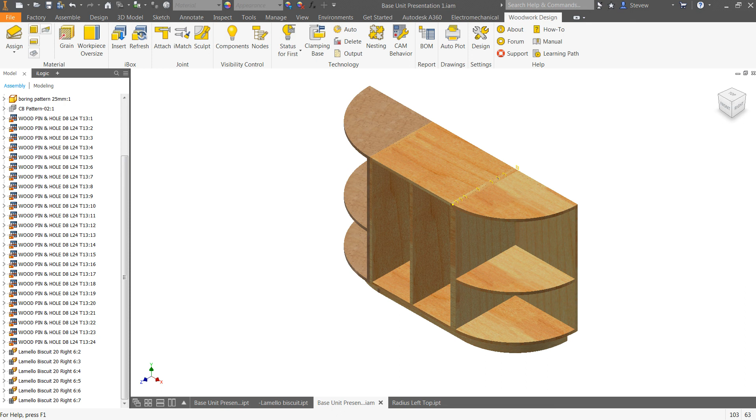One of the key areas of interest many of our woodworkers get involved with is pocket screws. Pocket screws are kind of unique because they're sometimes not machined - they're put in with other tools. Sometimes we let the shop put them in for us, and we don't call them out on drawings because it's just too much work. But because they're simple to do with the tools we have, maybe we will start including them. But again, that's your choice.

So let's say there is going to be a top panel put on here, and we want to put pocket screws to attach this top to the sides. Again, I don't think I'd do that, but for what we're doing today, I just want to use this example as best I can.

So the first thing we're going to do is go back and say place from my library. Let's go to my woodworking library, let's go into screws, and I have pocket screws.

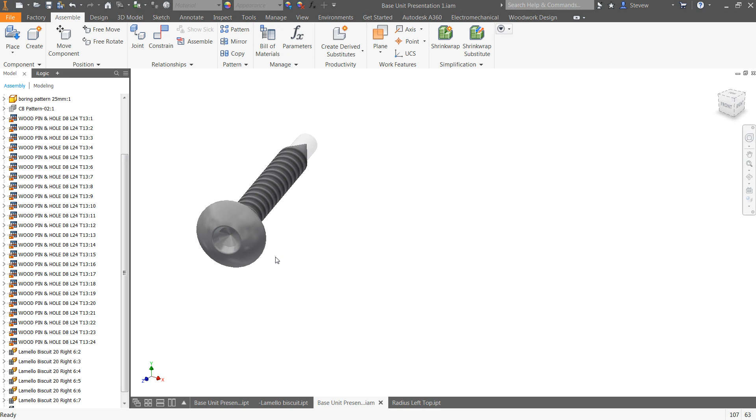So for all intents and purposes, simple screw. You could see the lighter tone - that means it's going to cut. That could be invisible, I'm just showing it. And maybe I want to put a series of pocket screws on the left-hand side and the right-hand side.

Again, everything I'm doing here with all the joinery takes only a couple of minutes, and it's fully functional. And if I change the model with iLogic, of course this all changes with it also.

So let's go ahead, and I'm going to say attach the screw. And if I'm going to put 12 or 13 screws in, think of all the effort you would have to go through in almost any other system. I'm not going to put one at a time in, I'm going to put multiples in at a time.

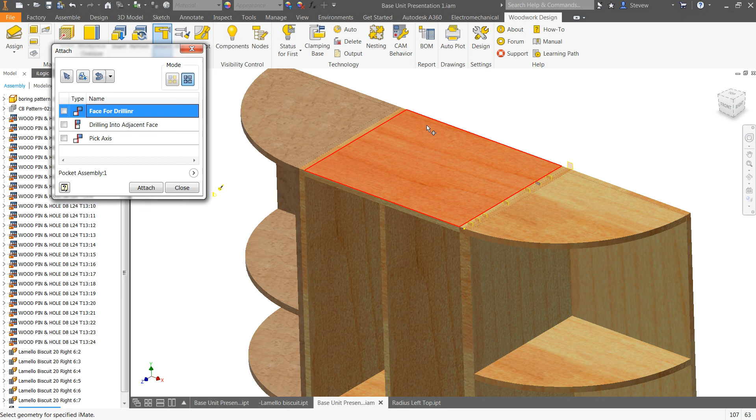And it's asking - I spelled this wrong, I see that - face for drilling. Well, this is the face, and I pick that. Drill into what? I'm drilling into this side here, and into the underside of that, as you can see, or I can rotate it around and pick that side there.

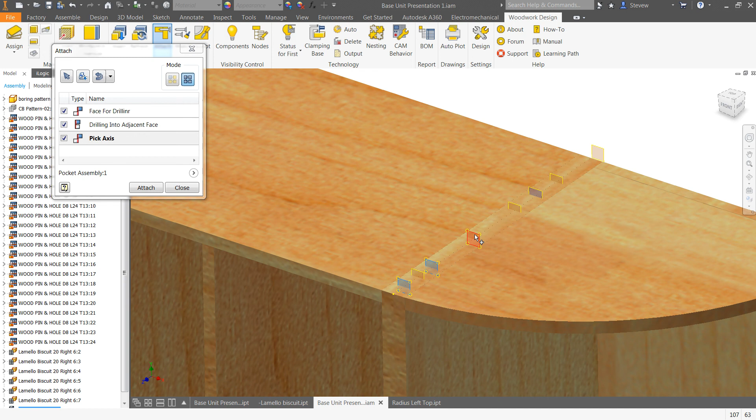Shelf pin holes, hinge holes, everything lines up. So I'm going to put, let's say, 1, 2, 3, 4, 5 - that's going to be 10 screws when I'm done. And I pick attach and sculpt.

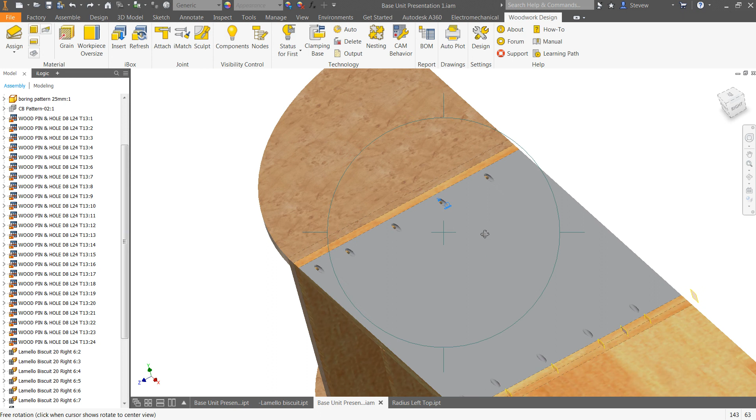Now when we look at this, I purposely had it change colors so you could see that, but you notice that it's actually put the pocket screws right on the dowels. They're dead on - that's the accuracy you're going to get. And if I get rid of one of the dowels, which I can just pick on these and get rid of them, then the holes would be there on its own. But you can see there's a screw right on the dowel. And that's now complete.

If we take the center by itself and open that particular file, take a look at it from a view - there is the pocket, there is the hole for the dowel. Again, very accurate both sides. Let's go back to the shading on this, and let's come back out of that.

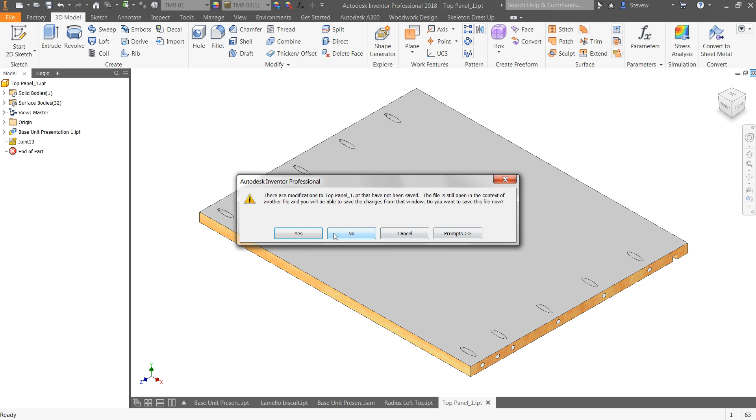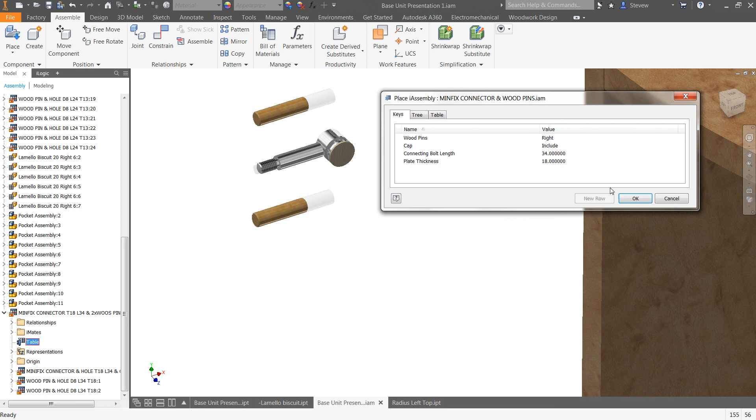Okay, the last thing I'd like to show today is cam connectors - Minifix connectors. So let's place from my library again, connectors, Minifix connectors. I'm bringing a Minifix connector in that has options. If we take a look at this Minifix connector, we could have dowels, we don't have to have dowels. Many of our library parts, and I've always suggested to all users, have the options of handling certain things. So if I want to exclude both of the dowels, I could, or I can say just keep the right one in, the left one in. Again, completely up to me how I want to handle that.

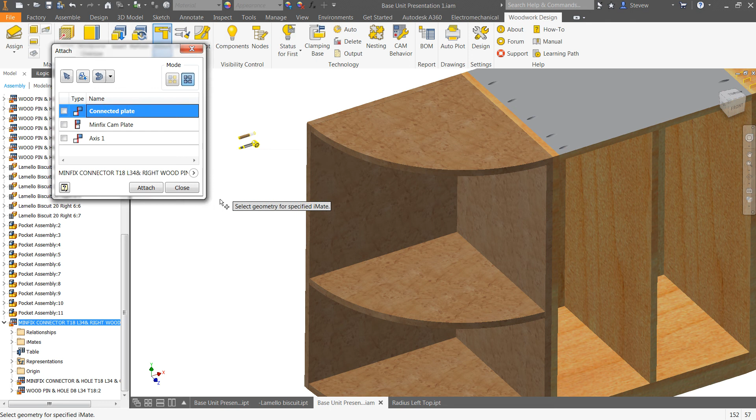So let's say that I want to put a cam connector connecting the shelves to this side board. Pick attach, touch it, and it's asking you for the connection plate - the connection plate will be this vertical plate. Where do you want to put the cam? Well, I'm going to put the cam 1, 2, and 3. And then finally, again, the same thing with these planes - where are they going to locate? Well, I'm going to locate one here, locate one here, and locate one here. And pick attach.

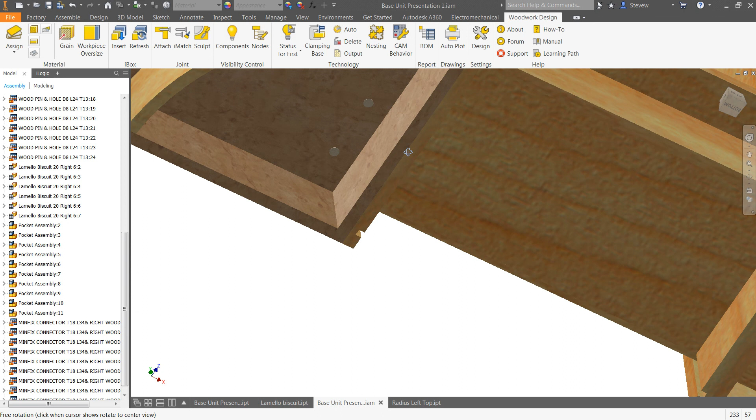And close. So let's take a look at what just happened here. It put 3 cam connectors on each one of these particular boards. And if I sculpt, it's created 3 holes, 6 holes, 7 separate holes that absolutely line up. So let's look and see what that looks like.

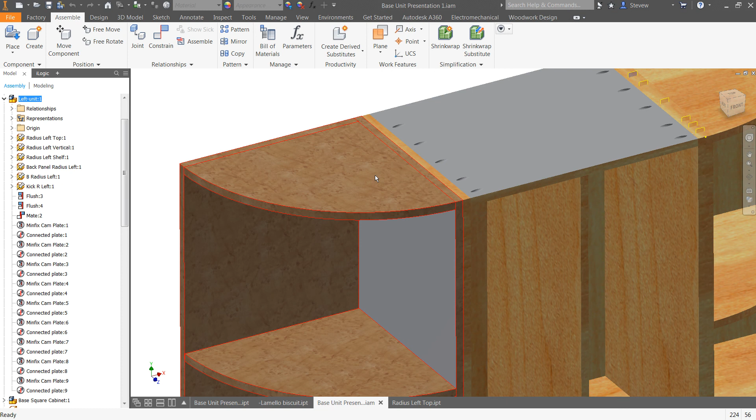Let's just move this out of the way. Let's see if we can - let's just open this up into its own file. Cam connectors there, in fact on all of them. Those are the holes that got drilled. Let's turn it off here.

As you can see, this is all automatically been done. Each of these, of course, is controllable by itself. Okay, so we're going to move any of these, okay? And that's complete.

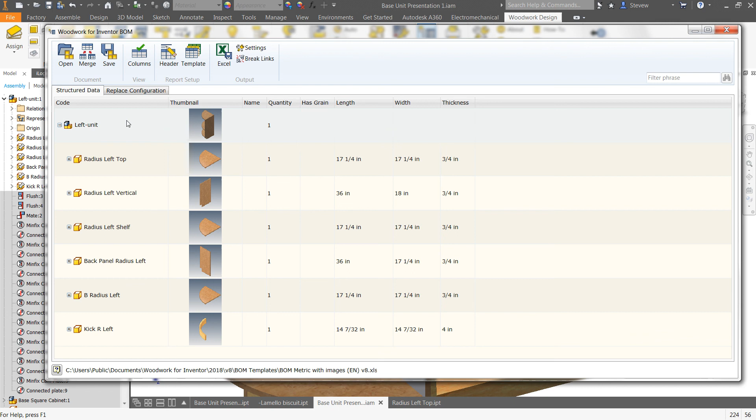All of these going into bills of materials should list everything here. This is listing just the left unit because that's the left unit that was the only one open. Let's go back to the top level assembly, do a BOM on that. Let's scroll down to the bottom, and you can see there's 9 Minifix connectors, 6 lamellos, and 24 wood pins. And 10, of course.

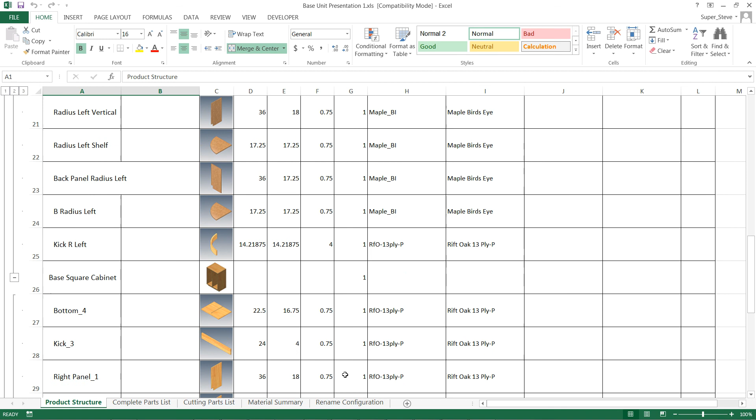Pocket screws. If we go out to Excel with this, what Excel will do is create a full listing of everything here and actually create a structure that will place it in a report that you can generate, or it generates on its own. Material summary, and you can see here the purchase units that have been applied.